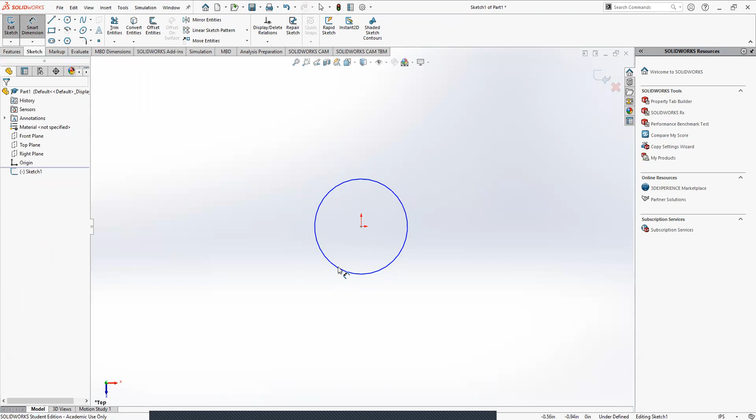Let's just start by making a circle here. We'll do a center point circle, centered on the origin. What do you guys think would be a reasonable diameter for this? This is going to be the central part of our flag stand. What are you guys thinking for a size? Let's go 4 inches.

So that's going to be our circular base, because right now we're really going to be working on making our legs. We're just going to have them be flat legs, not coming off at an angle or anything. It'll be really simple.

So to make our legs, we could try doing a rectangle. Don't follow along here, I'm going to just show you what happens. But if I do the 2-corner rectangle, I could have both corners touching this circle, right? And do that. That works pretty well, right? And then all I have to do is delete this line here, and then I have a nice little rectangular piece coming off the circle.

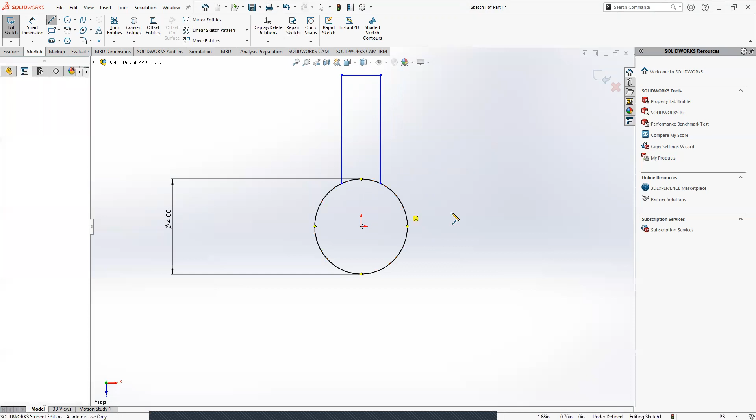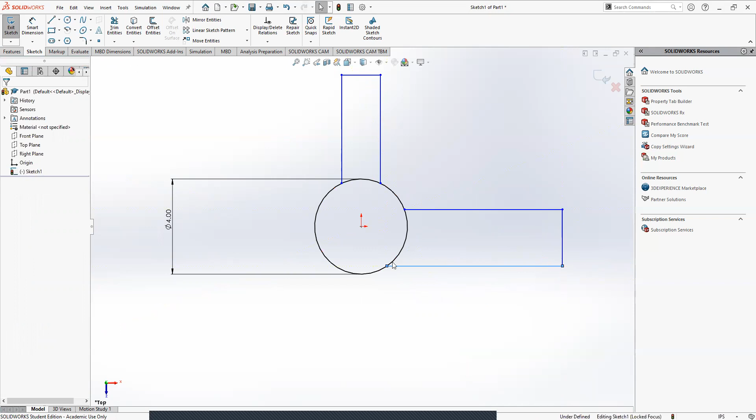The other thing I can do is just use lines to make a rectangle, just 3 lines, 1, 2, 3. So let's do lines for this. We'll basically make 4 rectangles around it and just use lines to make those rectangles. Don't use the rectangle option, because that'll give us a bit more opportunity to talk about relations.

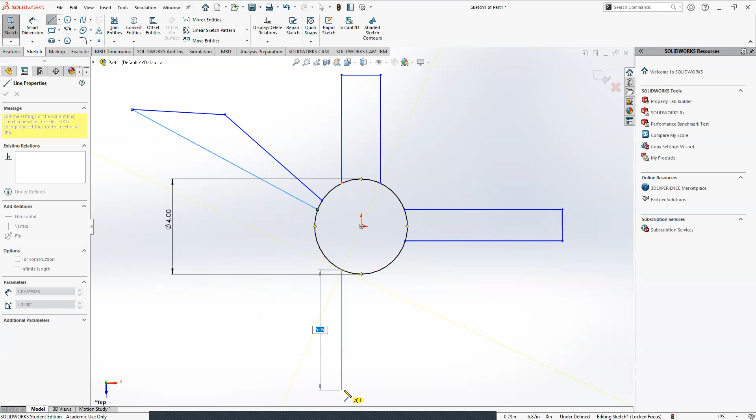One thing I'd like you to do for one of them is make it really badly. I'll show you what I mean. So I have 2 good ones, and then let's just make one that doesn't look at all like a rectangle, something like this. If you just make at least one of them look like this, that would be great, because that's how we're going to start to demonstrate how relations work, and that'll be really helpful. So let me know once you have 3 okay looking rectangles and then 1 really bad one.

How you guys doing? Are you stuck on anything? I'm still drawing the rectangles. Okay, cool.

In general, in this case, it would probably be easier to do the rectangle. And honestly, if you want to do the rectangle for 3 of them, go for it. I just wanted one that's going to have really bad lines. With the rectangles it makes the lines really nice, which is kind of against the point. But in cases like this, it probably would be quickest to do a rectangle and then cut out that line there.

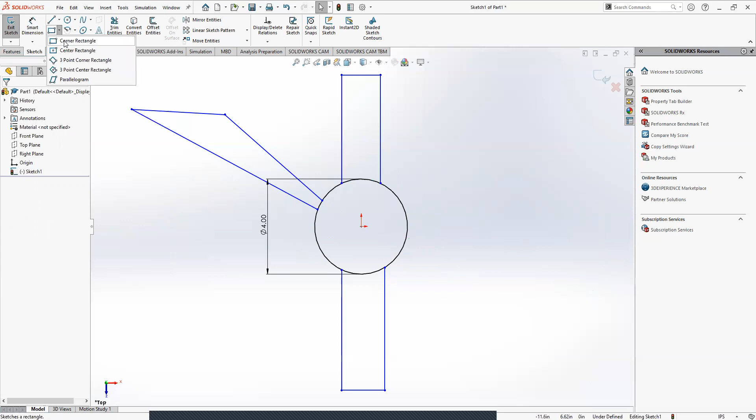And if you look, there's a bunch of rectangle options. I'm going to delete one of these, just so I can show it off, because if you guys wanted to use rectangles for this, there's a really nice rectangle option. You can see there's different options when you do rectangles: a corner rectangle where you click one corner with another, a center rectangle where you do a center and then a corner. This one's really nice though, because you could do one corner here, another corner here, so you got both corners touching the circle automatically. Then you can place your last corner and delete this. That's a really cool way of doing that.

I'd highly recommend messing around with some of these because I don't think I'm going to cover even close to all of them, but it's really useful.

All right, guys ready? I'm good. You good, Murdo? Yep, we're all good.

So let's first start with this really bad one. We're going to try to make this one look nice. And what's interesting is in SolidWorks you could dimension things. I was talking a lot in the last one about making sure everything's fully defined.

Notice this circle is fully defined. Why is that? Well, it's because we gave it a dimension here, so that means the outer ring can't get bigger or smaller. And if we look at the center point, it has this thing called coincident with the origin.

This is what's called a relation, and you can kind of see them with little green squares. If you click on these lines, you'll see they also have relations. This point here is coincident with the edge of the circle, and it is vertical. That's how we're defining this line.

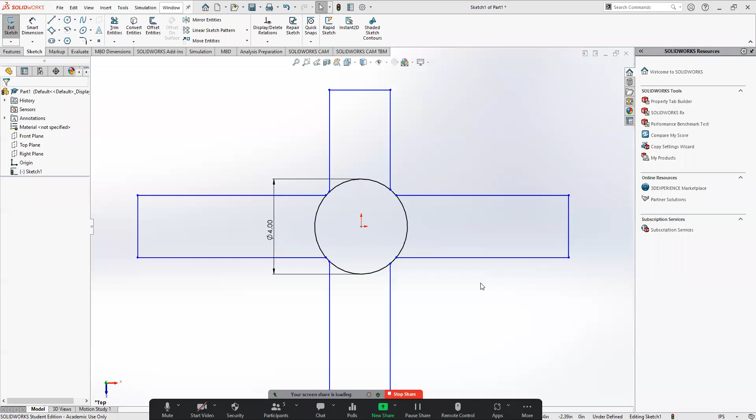So I'm assuming your lines are yellow, right? No. Oh, wait, so there's nothing yellow? Yeah, there's nothing yellow. That's why I'm a little bit confused. But I've got a lot of green on my thing. You have a lot of green. Okay. Everywhere. It's always been like that though. It has? All right.

So that's the issue with relations. If you're not paying attention to which ones you add, occasionally you'll add two that conflict or two that overdefine something. So it's very possible you might have just misclicked a line where it just doesn't work when you were selecting stuff. So I would try deleting your relations, like any equals relations, I would start with deleting those. Okay, I'm gonna try to just kind of redo it. All right.

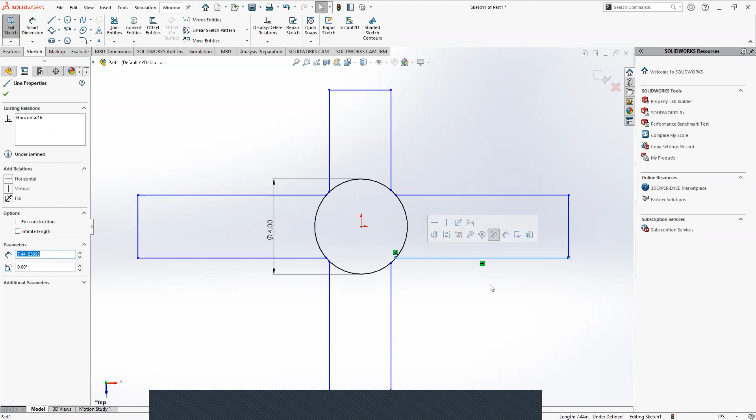Now this guy's broken. Let's see. I'm also noticing this guy's not defined as being vertical, so I'm going to fix that. Make him vertical, make him horizontal. I'm not really planning on fully defining everything here. This was more meant to be a playground to show you guys a couple different relations. So if you see anything on yours where you want it to be a certain way, go ahead and add it. I'm not planning on finishing this part though; this is just a really good way of showing you a bunch.

But here, Julie, I'm going to show you what happens when you try to break something. Remember how I already set this one to be equal to this one? So now I'm going to say that this is going to be 2 inches. Now, this one is equal to this one, so this is also 2 inches. And these ones are also all equal, so all of these should be exactly 2 inches. Now, let's say I dimension another one. This is a really good example of the difference between yellows and reds, which would be when you're over defining versus when you've broken it.

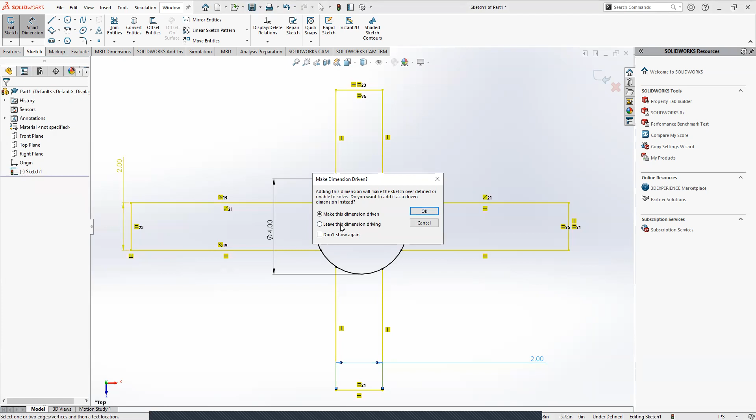So let's say I click that one. Now it pops up with make it driven, because it's going to over define it. I'm going to say I don't care, leave it driving. And look, everything's yellow, right? Technically nothing is broken, because this is 2 inches. I've just set it an extra time. But it really doesn't like that. Whenever you make two lines equal, if you then give both of them their own dimension, it's going to get angry. If you set one of them to 3, it would turn red. With them both being 2, it's true, it's just kind of scary for SolidWorks.

But yeah, if I were to, this one's 3, hold on. It's not letting me do it. Hold on. What I can do, if I really want to do this, is delete this equals and add it back in, just to kind of force it. So we'll make this one 3 inches now. And now I'm going to say this one's 3 inches, this one's 2 inches. Now let's make them equal.

And now we got our red, because I basically told it 2 things and one of them is not true, right? If I tell it 2 things and they're both correct, but it's repetitive, it'll throw yellows at you. When you get reds, that means something is wrong. Now that's not to say getting yellow lines is okay. You really don't want those. That's really bad, because essentially the sketch just locks itself. See how everything's just refusing to move? So you really want to avoid both. Don't ever have either.

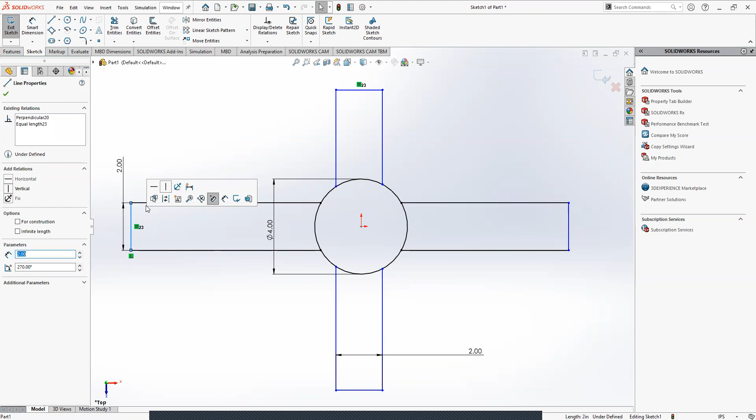And I will say, guys, I was kind of mixing and matching which relations I was doing. I did collinear here, a perpendicular here, and equals here, just because I was trying to show off a bunch. Generally, you don't want to just mix and match relations and go crazy. It kind of goes under best practice when you're designing. A lot of the times, for example where I did perpendicular and parallel and horizontal, if I know I want this line to be vertical, just make it vertical. Don't do perpendicular.

Whenever you're putting a dimension or a relation down, it becomes important to think about what the goal of it is. If I'm making a flagpole, I want the pole to go up and down. I wouldn't say it's perpendicular to the ground. I would want it to just be vertical, because I don't really care if the ground is even or not. I want it vertical.

And you'll see that a lot in sketches, I do it all the time too, where I'll say, oh, I'm just going to make this line perpendicular to this one. But really, this line's supposed to just be vertical. I don't care if it's perpendicular. So when you're designing parts, you really want to be careful, because a lot of times it's like, do I use a relation? Do I add a dimension?

As you learn to mess around with more of these tools, you'll see that there's a lot of options to fully define your parts. And it's important to think about what you want each of these lines to do. Because, I don't know, have you guys ever been in a Microsoft Word doc and added a picture and it messes everything up?

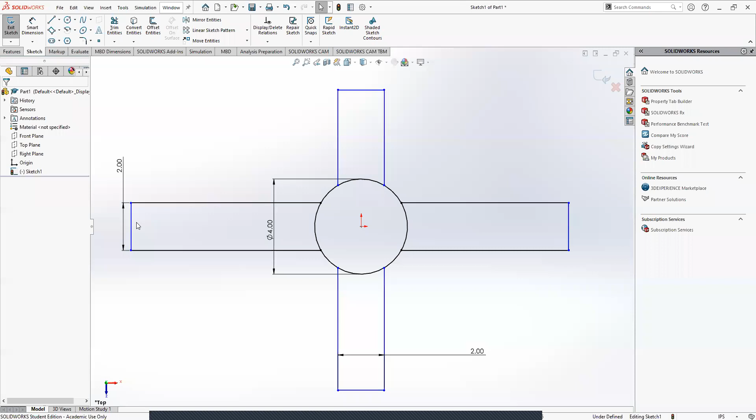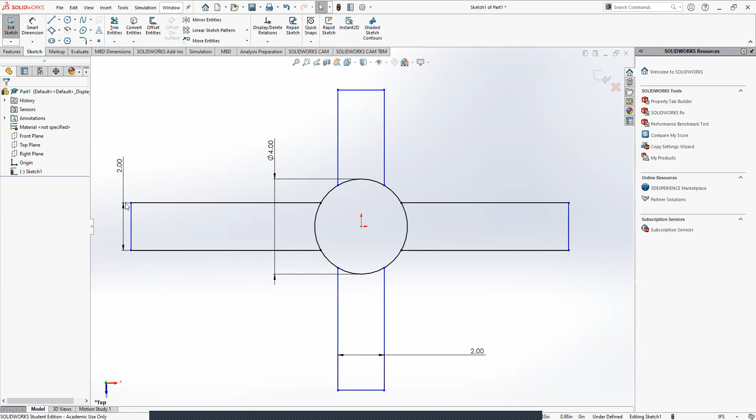A lot of times you'll change a dimension somewhere, and because you set up all these relations, something will break. So it's a really good idea to think about the purpose of what you're doing and think through what the best option is. One of the tricky parts with SolidWorks is you have so many choices. I'd like to clarify, with this one we used all the options. You want to be a little more selective than that. This was really just to show you what you can do, probably not what you should do.

So I'm going to delete this sketch. Going to hit the red X, discard changes. One of the very few times I've ever done that intentionally. Usually I hit that X by accident. And we're going to start a second sketch. So that was just to introduce you guys to relations, and now we will try making an actual part.

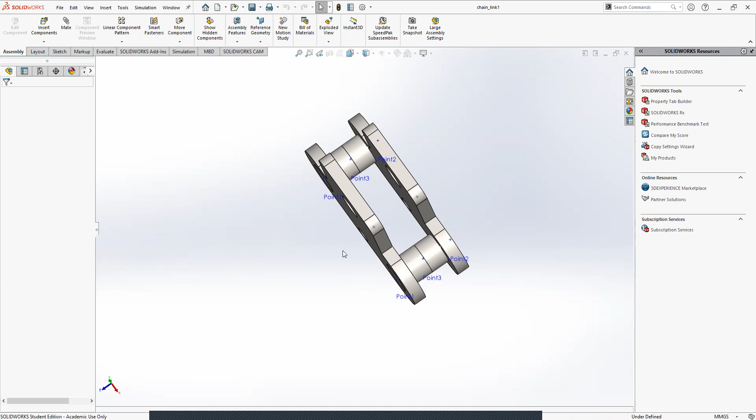So what I'd like to try making is a chain, not chain on a robot, but lifting chains. Hold on. I'm just gonna pull up a... I put chain link into my Windows search and a SolidWorks model of a chain link came up. That's not the kind of chain link I wanted though. Hold on.

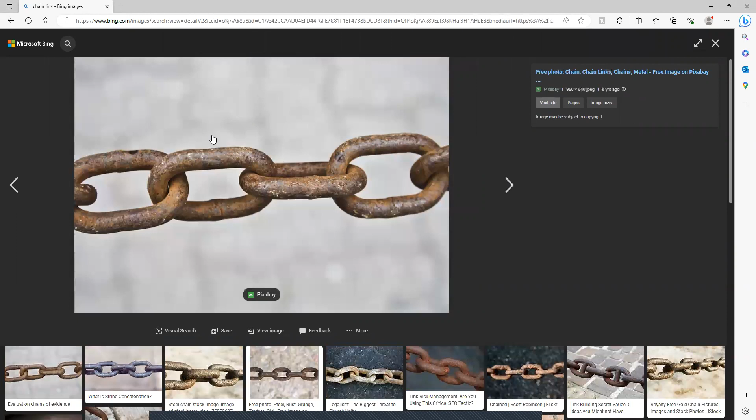All right. What I want to make is one of these guys, just a single link of a chain. We're not going to worry about it actually being rounded. We're basically just making the oval and we'll extrude it, so it's still going to have corners. It won't be nice and round. We'll basically just be making this oval shape and then extruding it. So let's get started.

This will be a quick intro to circles and arcs, and we'll get to use a couple of the relation things that we learned. Is everyone ready to start a new sketch? All right, as long as no one's stuck on anything. So I'm going to start a new sketch on my top plane. Doesn't really matter what plane you choose for this.

Now when you're making a chain link, I'm going to just sketch it out with lines real quick. Or we'll do this more as a walkthrough. So first I'm going to start by making two lines going like this. This will form the straight part of our chain link. Everyone following so far? I don't want to lose anyone. Yeah, I'm good. You're good?

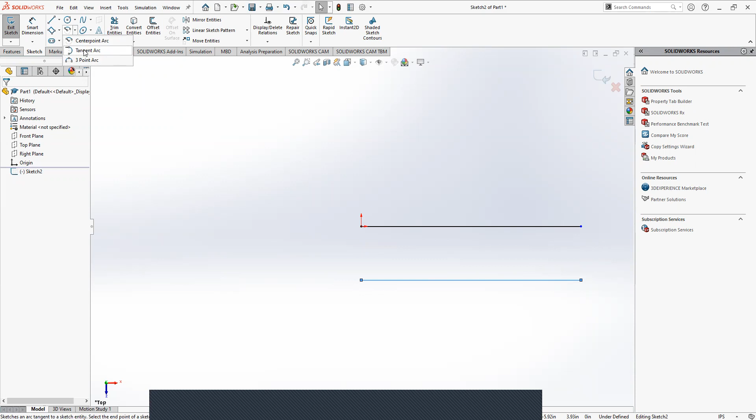Awesome. So now we need to add a curved piece here for the ends of our link. I'm going to go over two different arcs real quick. If you go to your arcs, that's the one right under the circle, you'll see there's a bunch of options. We can do a 3-point arc, tangent arc, or center point arc. I'm going to do the tangent arc first because this is the easiest one in this case.

In a lot of these situations, there's going to be an easiest way of drawing these different shapes. So if you have a chance, just open a new sketch, draw a bunch of shapes and see how it feels to do each one, because different ones will be useful in different places. So we're going to do a tangent one.

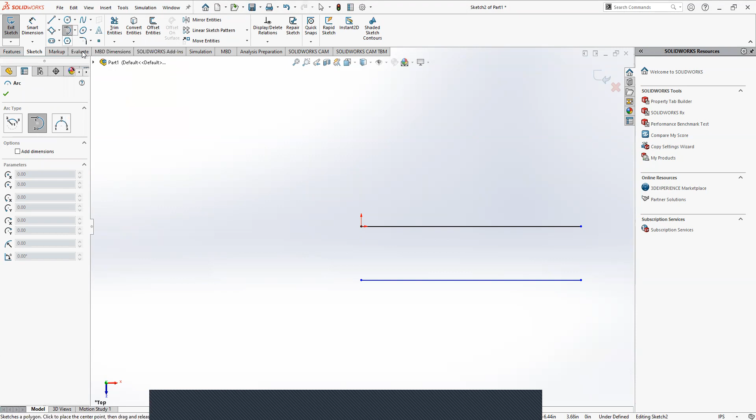And you can see what it ends up doing. Oh, here we go, it actually gives a little animation of how it works. It's going to make an arc that is tangent to a sketch entity. Basically that means if I go from here to here, these lines are tangent to this curve. I don't know if any of you have taken calculus yet, but once you do, this will make a whole lot more sense.

All it's going to do is make a curve that's almost lined up with these really well, so you can see it's a really smooth transition. So just use the drop down to make a tangent arc here, and let me know when you guys are finished up with that.

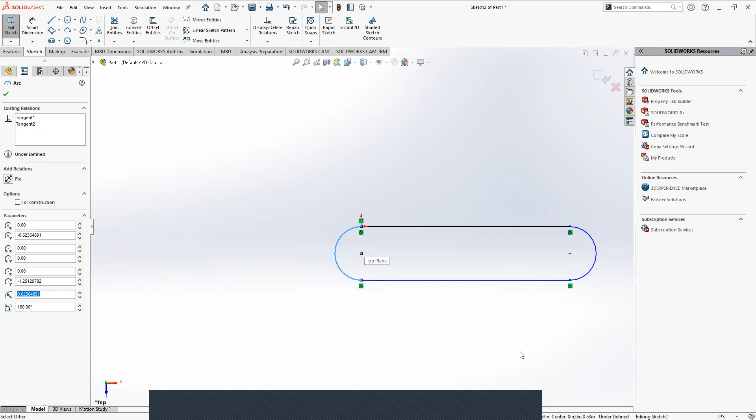That's why I think tangent arc is probably the best, because if you look, when we drew the tangent arc, SolidWorks already made those tangent relations for us. Tangent arc is definitely the best option for this, but I want to show you guys center point arc still. So with center point arcs, you need to start with a center point. So let's start by making a line here, and you'll kind of see why we're doing this in a second. So we're going to start by making a line.

And I'm actually going to also use this as an opportunity to show you guys how to do construction geometry, which I'll explain a little bit. But we're going to click on this line that we just drew. And if you see under options, we can click for construction. Now, construction lines are really, really useful. Basically, the way they work is, remember in the last class how we would draw a bunch of lines and then we'd extrude the shape that those lines made?

Well, if I'm ever using lines, like this line, I don't want it to be part of the shape. I'm just using this to draw my center point arc, right? And I'll show you how we're going to use that to help us. But I don't want this to show up in the actual shape. So if I make it a construction line, it basically just ignores that line when we're doing extrudes. So it'll do the extrude as if that line was never there. And if you guys want, when we do the extrude step, I can show you what happens if it is a construction line versus when it isn't, just to show you why it's useful.

But we're going to click over to center point arc. And now if we look, it gives us a little infograph here on what we need to do. We could also watch the animation up here. Most SolidWorks commands have a little animation to show you how to use it, which is unbelievably useful. I absolutely love it. But as you can see, the first thing we need to do is select a center point. I'm going to choose my center point to be the midpoint of this line.

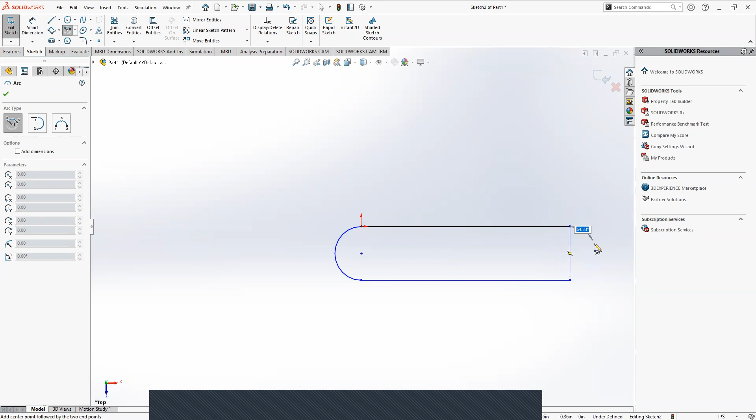And you can see that as we're getting ready to do our point for the arc, the midpoint of this line kind of just pops up really strongly. Like you can see that when I do that, it just pops up. So I'm going to click on the midpoint, and then I'm going to click this point, and then I'm going to drag down, click that point. And boom, now I have another arc.

And that's the other way you can draw a really nice arc in this case. So center point arcs, you need to start by selecting a point, basically. And that's why we drew that line here, because we wanted to use the center point of this line as the center point for our arc. And you can kind of see here that this point is probably midway between these two. Well, we actually know it is, but you guys still following?

Yup. Cool. And honestly, as you guys do more, you can use any of these arcs in really any situation. But a lot of times one will be a lot easier to do. Like, for example, with this guy, really no work. This was the best option. I clicked one point, clicked the other point, and I got a beautiful arc just like that. The 3-point arc, I was able to draw it pretty quick, but then I needed to add relations at the end. And then with this center point arc, I needed to almost do prep work first. So I got the same thing with all of them, but tangent arc was just by far the easiest.

And the thing with a lot of CAD is you're definitely going to have to experiment yourself and play around with it, because it does take practice, because there's just so many options, and it's a very creative thing you can do. So right now we kind of have the outside of the link. Now we need to add the inside, so we have that hole in the center for the next link to slot into.

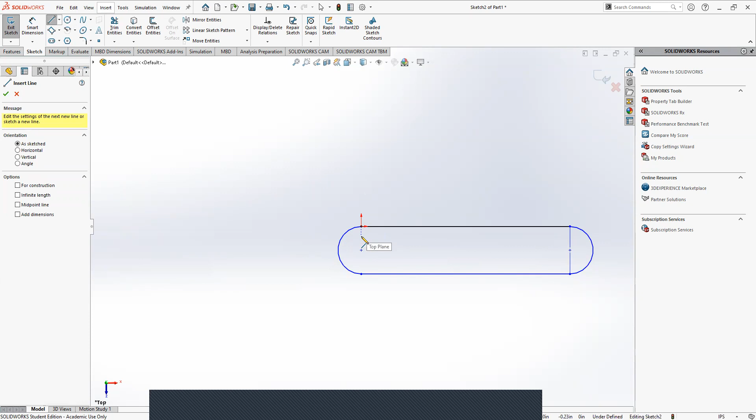So what I'm going to do is add another set of lines. Or actually first, before we even do that, see how I have a bunch of blue lines? As I drag stuff around, stuff moves. I don't like that. So we're going to fully define all this first before we move on, which is probably a good idea. So first we need to decide how wide we want our chain link to be. Anyone have any ideas? Anyone want to pick a number? All right, we'll call it 3.

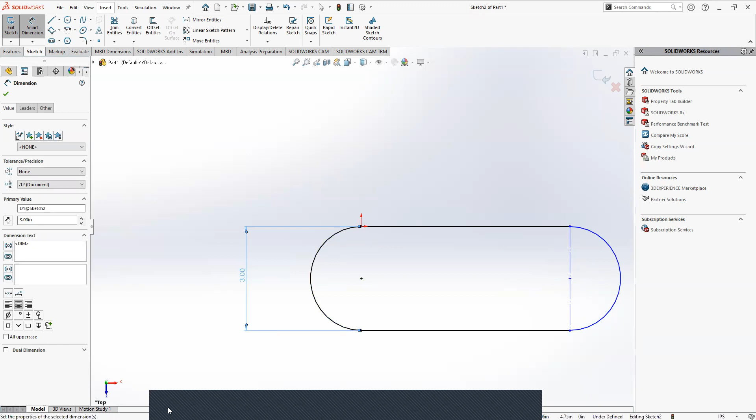And then once you do that, we can decide how long we want our link to be. So I'll just do how long I want this line to be. I'll set that to be 4. Oh. Yeah, Aaron? Can you use a straight slot for this? Will that be something that works? Sorry, can you say that again? I have my volume down a bit. Can you use a straight slot? Oh, straight slot? Yeah, absolutely. We literally just took extra time making a straight slot. Yep.

Yeah, if we're making a chain link, straight slot's probably the easiest way to do it. I just wanted to show off how to do arcs. But yeah, 100%. What Aaron was saying is, I'll do this up in the corner up here, we literally could have just used straight slot to make that exact same shape. Yes, that is true. That would have been an easier way of doing it. Right here, I'm just trying to show off how to do the different arcs. If you're ever trying to make a chain link, definitely use straight slot. Actually, you guys want to learn how to use straight slot?

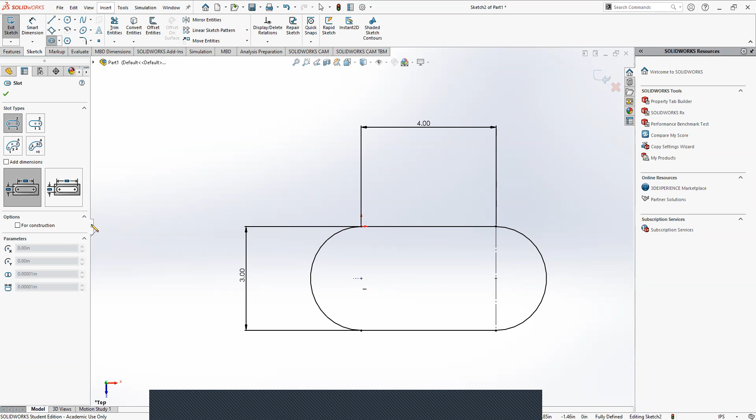Yeah, let's do it. So because we still need to do that cutout center part, we can use straight slot to do that. The way straight slot works is first we draw a line, and that's the line that our slot forms along. So we'll do two clicks there to make a line. And then our third click defines how wide our slot is. I'll just demo it real quick. First I click on this point, go to this point to make our line, right? Now, as I expand it out, I can determine how wide I want my slot to be. And I'm just going to eyeball it because I'm going to have to dimension it later anyways.

Something I've seen a lot of people get confused on is you can often see the dimension of what you're doing as you're drawing it. That doesn't mean it's fully defined. If I were to put in 2 here, it'll make it 2 inches, but it won't add that dimension.

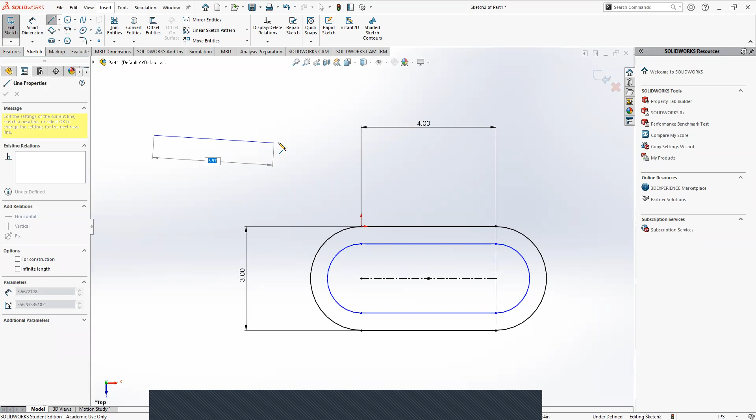See, I made it 2 inches exactly, but it's still underdefined. I helped teach a SolidWorks class over fall semester of college, and this is something a lot of the students have trouble with. Even if you're drawing a line real quick, I can kind of show you. You can see down here in this corner the distance, and you can see here the distance. But even if I hit 5 to make the line exactly 5 inches, it's not defined at all.

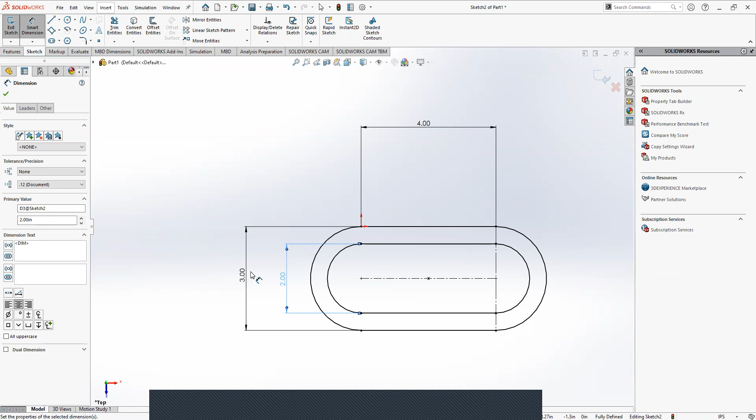So even if you know it's the right length, like I know this is going to be 2 inches, still add the dimension though, just to lock it in. It's a very important thing to get in the habit of, because a lot of times what'll happen is if something's underdefined, sometimes if you change a dimension somewhere else, it'll just go crazy, kind of like adding a picture into Microsoft Word. So you have to be very careful about making sure everything's fully defined. But you also want to make sure you're defining everything right. You don't want to just throw in a bunch of random relations, kind of like what I was saying with that flagpole thing. You want to think about it first.

But yeah, has everyone been able to get to this point? I'll be honest, I almost never use straight slot just because I usually don't make these kinds of shapes, but it's definitely a useful tool, as Aaron pointed out. Is everyone good here?

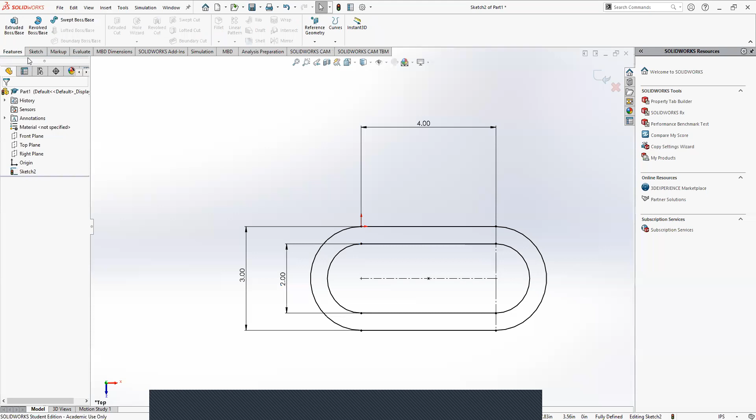Yeah, cool. And I guess we're actually going to still make this rounded, I think. So let's extrude this, and we'll extrude it 0.5 inches, half an inch. And this is an okay looking chain link, but you can see that we still have these corners, these edges.

And so this is an excellent way to start talking about fillets and chamfers. A lot of times when you're making a part, you don't want it to have a sharp corner. Sometimes you do, sometimes you don't. Chamfers and fillets are both ways to basically take off edges or corners. I'm going to demo. What we can do is do a fillet on one side and chamfer on the other. So first, let me show you how fillet works.

So I click fillet, and this is in the features tab. From there it says items to fillet, so I'd click any lines or corners I want to get a fillet. I'm going to click this line. You can see it automatically selects the rest of it, which is very nice. I'm just going to fully select everything now, not the whole face. If you select the wrong thing, you can see everything's listed here. I didn't want to select the face, so I can just click on it and hit delete, and it's gone. You don't have to worry about closing out, reselecting everything. You can just click on the thing you don't want and delete it. So do that edge, we'll just stick to that edge.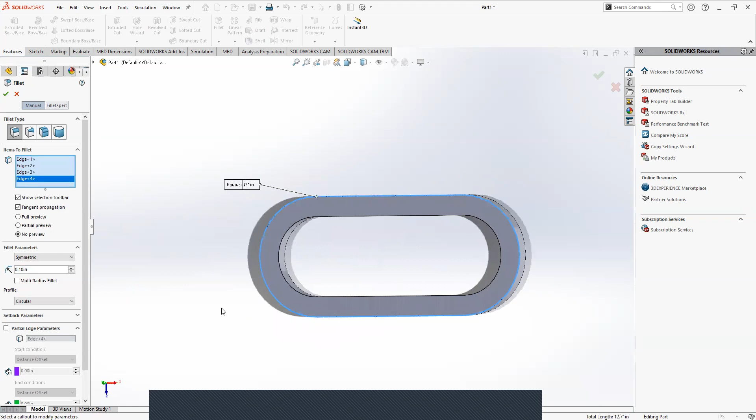And it's going to ask you a couple things. Do you want it symmetric or not? With fillets, you want to just leave it as symmetric. If you want to play around with asymmetric and see what it does, go for it. It's going to almost make it like an oval. What fillet does is it curves your edge. Chamfer will just kind of make it diagonal, like a cutoff corner kind of thing. So if you do asymmetric, it'll almost make it like an oval curve, whereas this is a circular curve.

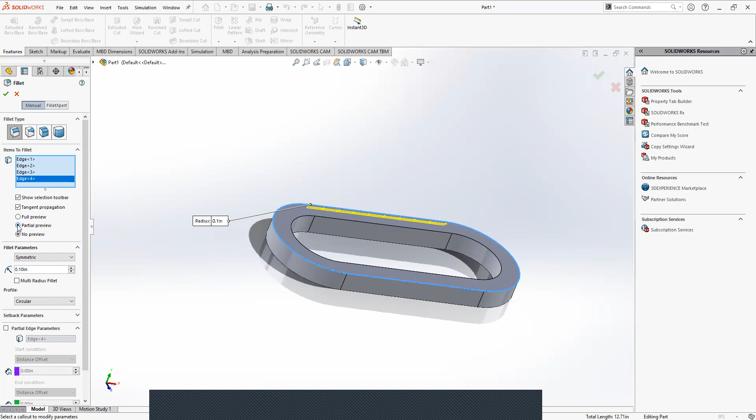Generally, the only thing I ever mess with on a fillet is the radius, so I'll leave it as 0.1, we'll see how that comes out. Another thing is you'll see these preview options. I have it as no preview, but I don't like doing that. What's nice is to click full or partial preview, and that'll show you what your shape's going to look like once you do it. You can see it's going to round off all our corners. And if I wanted to up this maybe a bit more, maybe I do 0.2. That's going to round it even more, just because you're increasing the radius. I kind of like how 0.2 looks, so I'm going to leave it there.

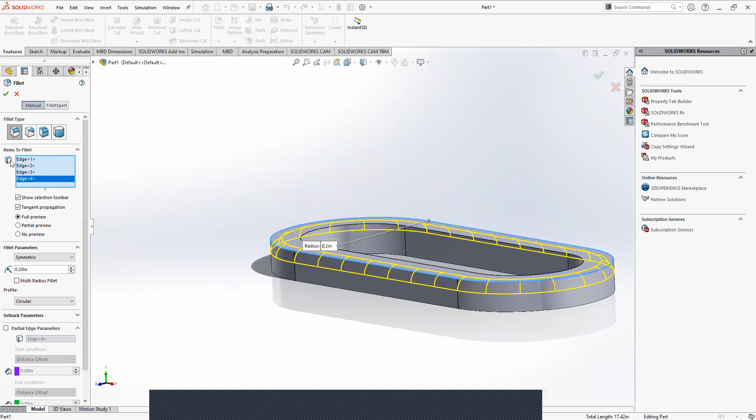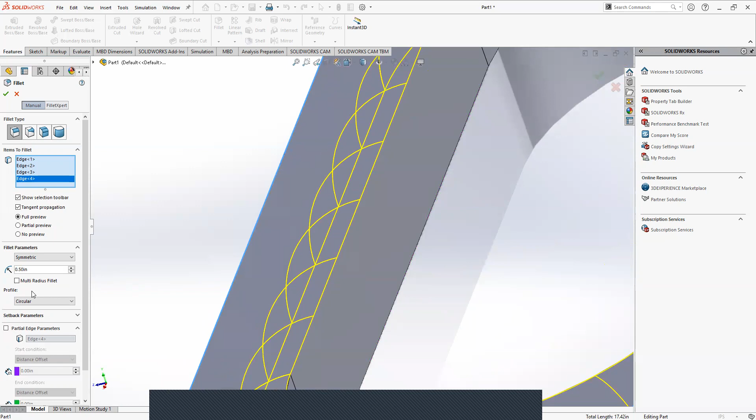You guys can set it to whatever you want. One thing I'd like to show you is if I try to do 0.6, that preview disappears, and that's because it's way too big. This is only 0.5 thick, so I can't do a 0.6 radius fillet. Let me do 0.5, but that brings me right up to the edge. See that? So if I try to do 0.51, it breaks.

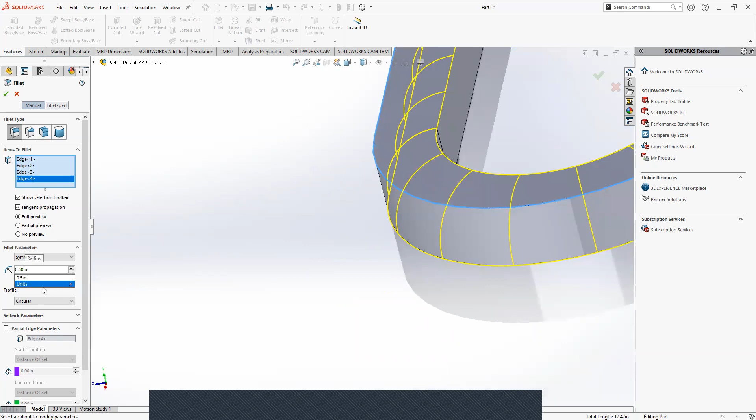So that's something you want to take into account. If you're trying to do a fillet and your preview disappears, or it's getting angry at you, that probably means you made it too big. Or you just have preview off, so make sure preview's on. And if it's still not doing anything, you probably made it too big. I'm going to set this to 0.25. I would set it anywhere between 0.1 and 0.25, that should be okay.

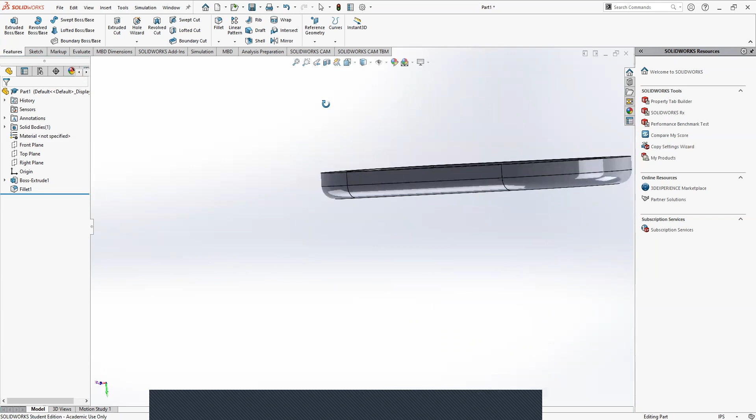Click OK, and now you can see that this edge is nice and rounded. We'll leave that. So I kind of want to show you what happens when we fillet a face.

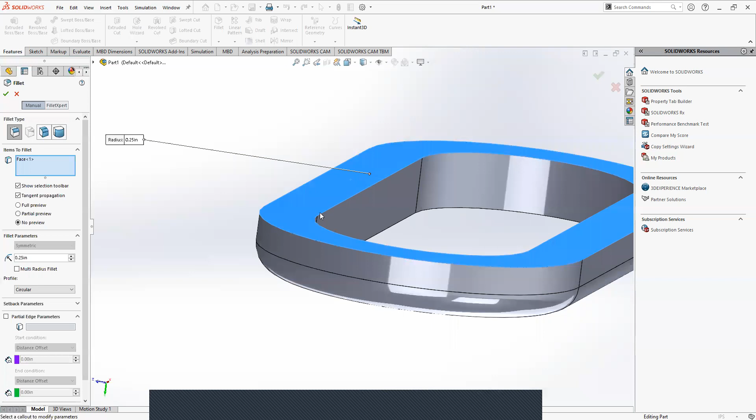So if I fillet a face, you can see what it basically does. Kind of happened too quick, we'll do a partial preview. So essentially what it does is it takes every single edge on that face. See how this face has the edge here and the edge here? It just rounds both of them, and you can kind of see how that looks. It just rounds both edges.

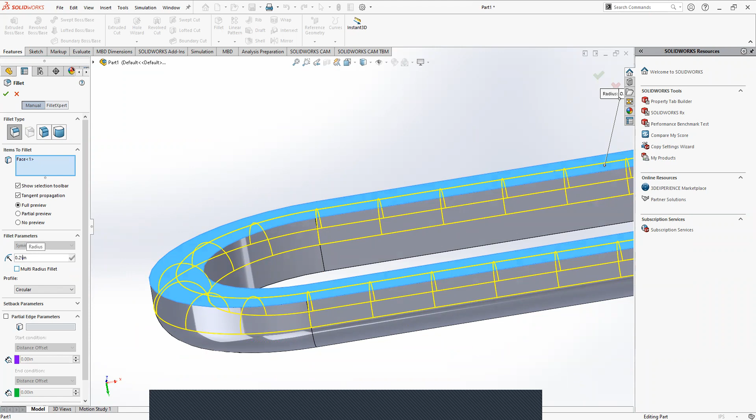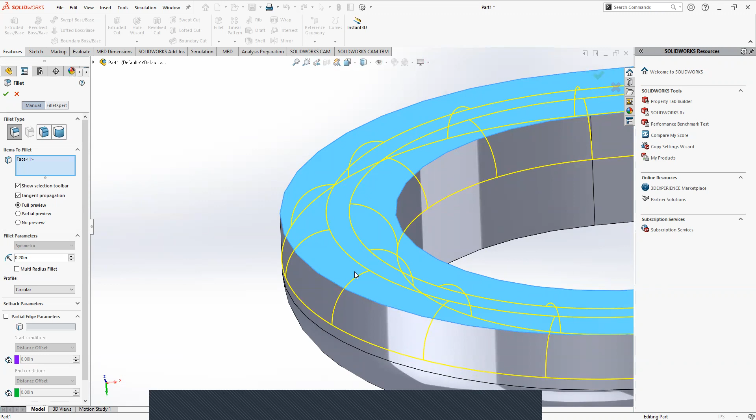And because I set it to 0.25, they meet up here. But if I do 0.2, you can kind of see there's a bit of a flat spot between the fillets. But yeah, we'll leave it as 0.2. That looks kind of cool, I like that flat spot. That's just because we have a 0.5-inch thick piece. So if we have two 0.25 radius fillets, that's going to make basically a 0.5 diameter semicircle, which will just round the whole thing.

Now we have that, and that actually looks quite a bit like a chain link with our fillets. We still have one more edge, though, you can kind of see here. So I'm going to wait for everyone to catch up, to make sure everyone's doing okay. Is anyone stuck?

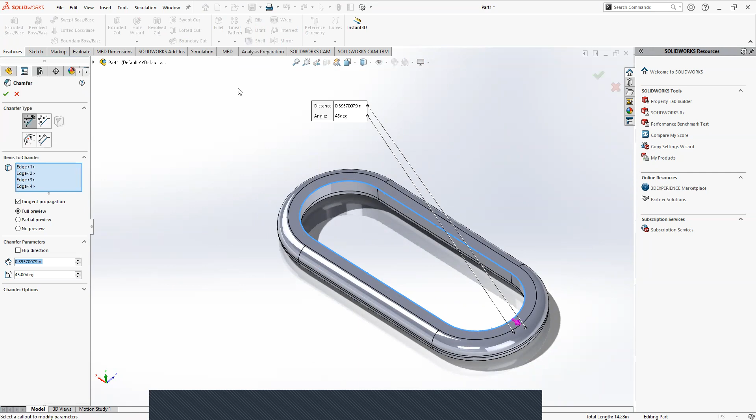All right, I'm just going to do one last thing. If anyone has any questions, I can answer them. One thing to note, in SolidWorks you can select your lines first. So I'm going to select the edge first, then I'm going to do the drop-down. I'm going to do a chamfer this time. I like how fillet looks, but just to show you guys how chamfer works. Oh, it's not going to let me do it, I don't think. Yeah, one thing to note, I don't think it lets you.

There we go. Okay, the way chamfers work, like I said, instead of rounding it, see how that's just a straight cut line? It basically just cuts off the corner, essentially. But yeah, what you can do is if you want, you can select the lines you want first and then hit the feature, or you can do the feature and then select the lines. Really depends on what you want to do, but you can do it either way.

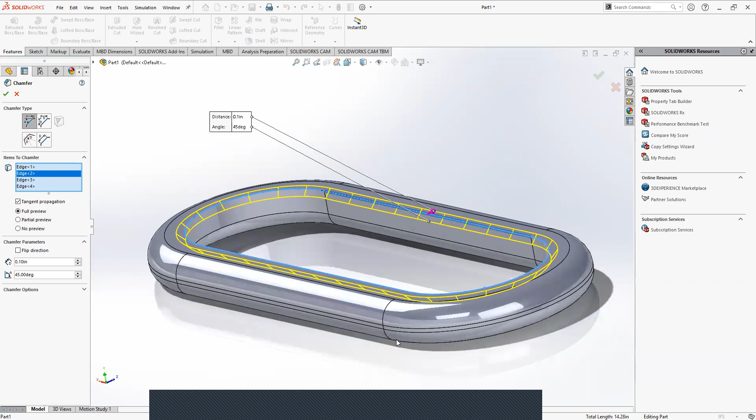And even though I'm in here, I can still add another line if I wanted to. But that's a smooth edge, so I don't have any more lines I can select, but you can still edit it if you want to. So I can get rid of that line, add it back in. Face, just the line. Just the line, there we go.

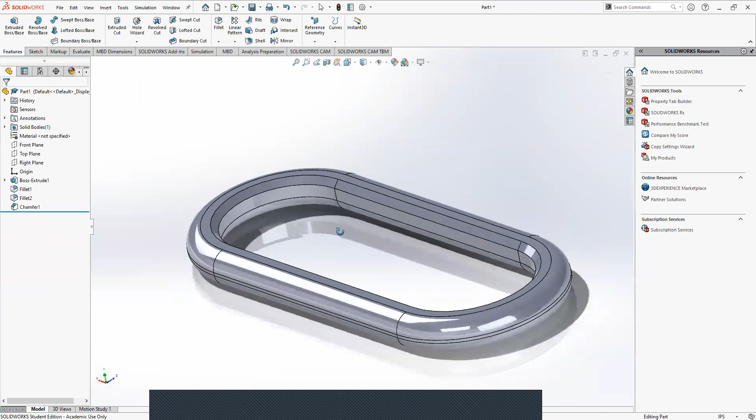Sometimes you got to zoom in, but I'm going to do this as a 0.1 chamfer. That looks kind of cool too, you got like an angled chain link that way. But yeah, you can kind of see this is like a straight cut, whereas the fillet is more rounded, and in different cases you might want different things. And I'll be honest, if I wanted to make a chain link, I probably would make a straight slot and then just fillet everything to round it out. Is that the best way to make one?

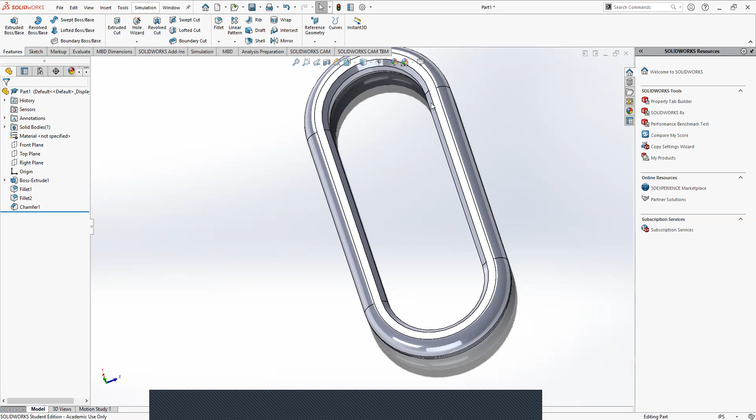Arguably not, we'll go into some other ways. Actually, I forget if it's next class or the one after, but we're going to go over revolve extrudes, and then I can show you guys a different way of doing a chain link, which would be kind of cool. But for now, I think that's everything I wanted to cover in this specific lesson.

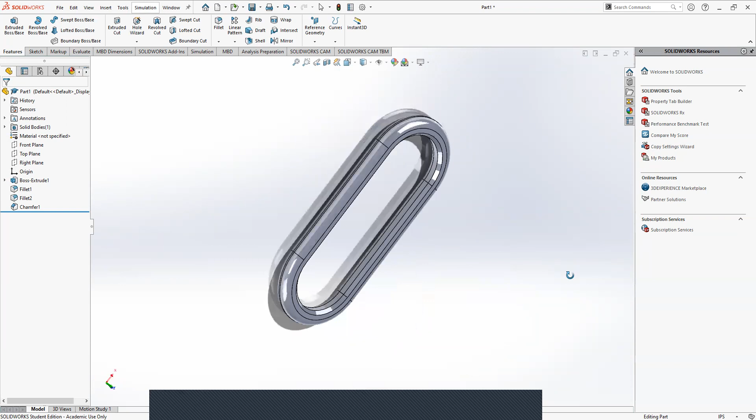I don't really have a challenge for this one. I don't know, maybe just try making a perfect chain link. See how this one has the flats and I have this fillet, or this chamfer instead of a fillet, if anyone wants to try to basically go back.

Oh yes, Aaron? You can just unmute and say it. I don't care, keep going. Okay, I filleted the inside of it. Yep, like the inside geometry of this chain. Yeah, I didn't chamfer it. That's okay, I just wanted to show you guys how to chamfer. Okay, like I'm not collecting these, these are yours.

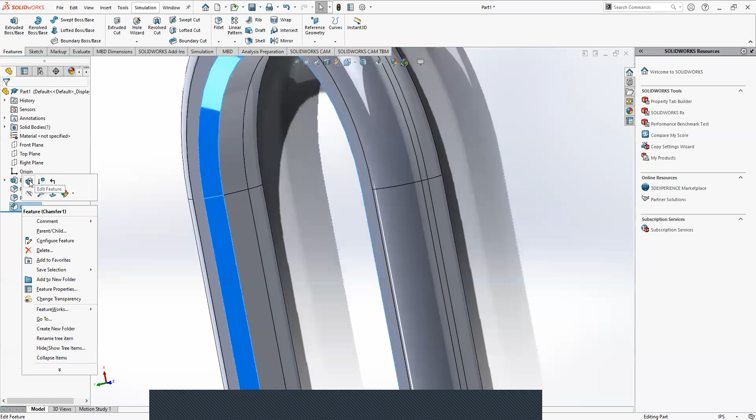Chamfer and fillet work very much the same way, it's kind of the same process. They just look different and have a different effect. And there's a lot of options in both, like in SolidWorks there's so many options. I'm not going to be able to cover everything, I'm not going to be able to cover every feature. There's just so much stuff, so a lot of it is going to be experimentation.

Like you can see here, there's a lot of stuff. I can change the angle of the chamfer if I wanted to, or I can even just change the type, where I can make it symmetric or asymmetric. There's so many options.

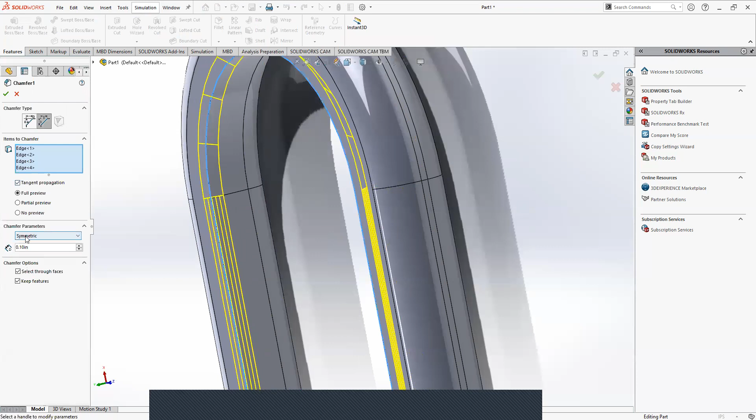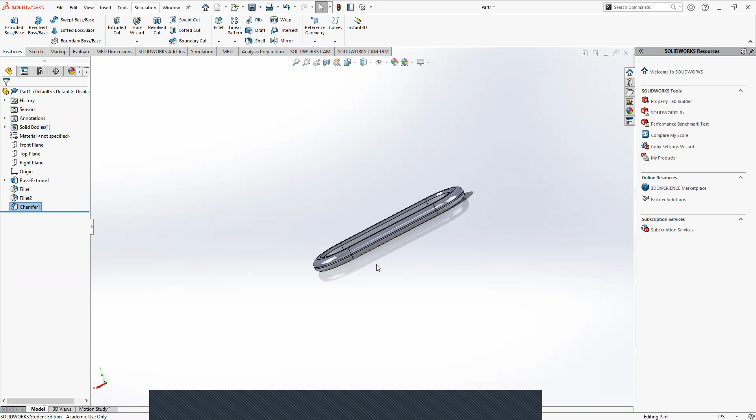I really encourage you guys, if you ever have free time, honestly what you can just do is, I think once we do one or two more classes, you'll probably be able to do at least a basic model of just about anything. It'll be different amounts of difficulty, but if you just have a water bottle on your desk, you could probably make an okay CAD model of it. So once you get to that point, I might make it a challenge to try to CAD something on your desk. You actually might already CAD a bunch of stuff on your desk at this point.

What have I taught, all that? I don't know, with this week's challenge, you want to try making a CAD model of your phone? That could be a pretty good one. I think I'm actually going to do that. If anyone wants to work on a challenge this week, obviously you don't need to, this isn't a school class. But if anyone wants to try practicing, a really good practice would be trying to just CAD your phone. Just get a ruler, get some basic dimensions.

That could be a pretty fun exercise. But yeah, honestly just try to make something, find something on your desk where you look at it and think, yeah, I think I can make that, and just try to make it in SolidWorks because that's a really good way to practice. One thing I've done to practice is try to make coffee mugs. Those are really tricky, but we'll cover more stuff later on that might help with that.

But I don't know, does anyone have any questions? Just to talk about what we went over - in sketches, we talked a little bit about circles. Oh, I should mention perimeter circles, you just click 3 points, you don't select a center point, it kind of works like your 3-point arcs. But we already touched on circles before, the main thing we talked about was the different arcs.

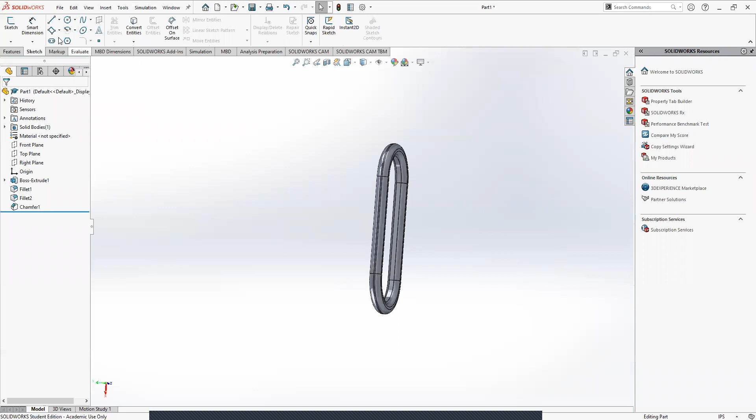We covered relations, and I showed you exactly what not to do, which was make a mess of relations. And we also covered chamfers and fillets.

And we also did a little bit of talking about design methodology. That's why I think making up something on your desk is a great idea, because these follow-alongs are cool, they teach you the skills, but it can be really challenging to just pick something off your desk and try to CAD it. So if anyone has time and they're bored, I highly recommend it as practice. But I think that's everything I have if no one has any questions.